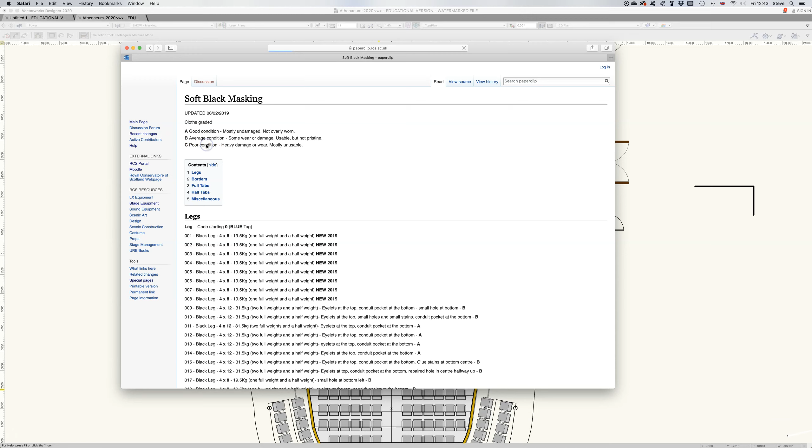So the first thing we need to know is our stock that we have at our disposal. If you go to paperclip, stage equipment, cloths, gauzes and masking, then you'll see the masking and the legs here. There's some new stock that came in 2019 that are 4x8 - 4 is the width, 8 is the height - and 4x12 is some older stock. It doesn't really matter too much about the height at the moment; the 4 width, because we're drawing in plan, is the important part.

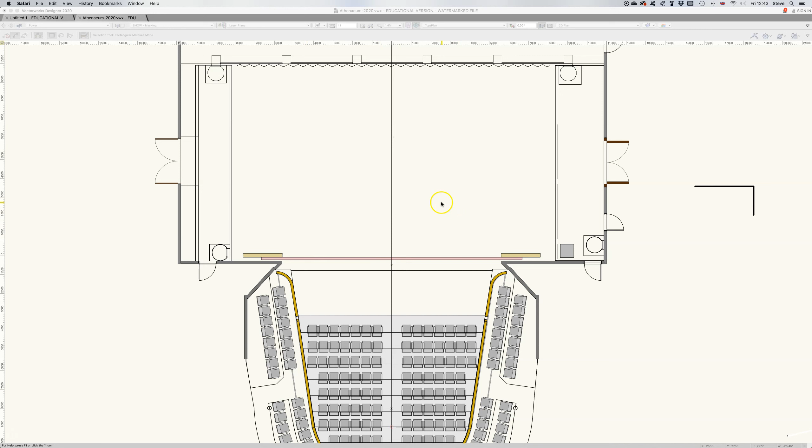So I've created a new show masking layer here, and most of the time when we are masking, we mask the proscenium arch, so I'll just do that. I'm using the soft goods tool within the event design tool set, so it doesn't really matter where in the wings because I can move anything. I can draw a 2 meter by 2 meter leg. There we go.

Now that would be fine. I could move that into position and start working out my leg masking at the moment, but there's a slight issue. The dog leg bars that we have in stock are 3 meters by 1.5 meters. So I've drawn one there just to show that this part would be okay, but we can't really have a 2 meter return on a 1.5 meter bar.

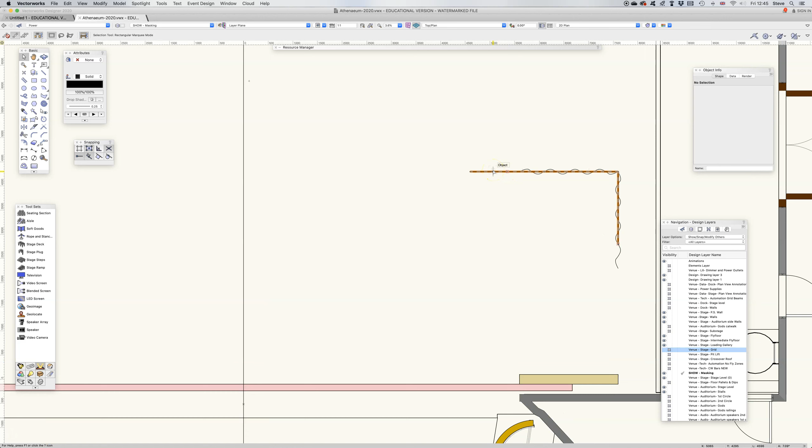We could make these up if it was important that it had to be 2 meters return downstage - this could quite easily be made up with scaffolding joiners, and we could hang that.

But I'm going to just assume that we're going to have to redo this leg here. I could edit it, but it's probably just as easy redrawing this.

I'll start in line with it, and we'll go 2 meters off stage. So that bit was right, but we'll only come down 1.5 meters, meaning that they will fit onto the existing dog legs. So a little bit of an error there, but it's okay.

So if I pull that down - what I'm trying to figure out here, if I use the line tool, is what can this audience member, who's the most extreme, closest to the proscenium arch - that's the worst seat there, don't tell anybody who's buying tickets to sit there - see. That audience member is looking past the tormentor there and straight into the wings.

Right about there, straight into the wings. So what we need to do, if we want to mask, is bring that leg down as much as we possibly can without really annoying the DSM, because they need to see it, as long as that sight line bisects the return of the leg, then the audience member is looking into masking. So that kind of works on that side.

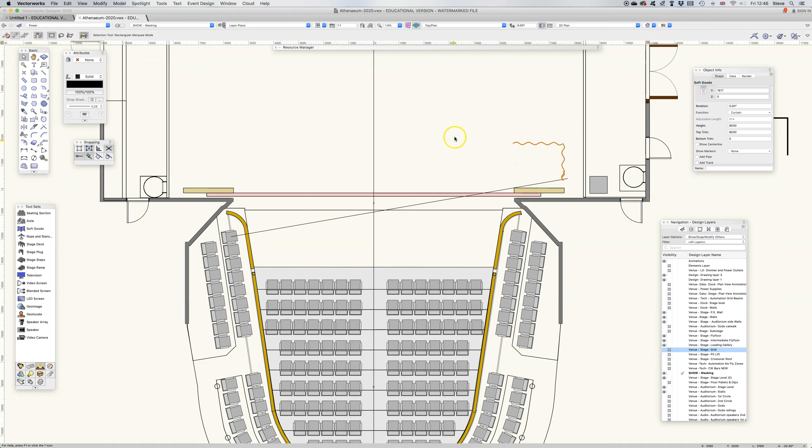I'm going to draw another one. I would normally duplicate, but since I made a mess of that first one, I'll just do another one. So we have 2 meters off stage and 1.5 down stage. There we go.

Oh, I've still got a funny little thing. I'll just duplicate them. So the next thing we need to see is what can this audience member see past that leg. As soon as they see past that leg there, we need to grab this leg here and bring it down to make sure it bisects that, so the audience member can see past the onstage part of that and into the downstage part of that. They can't see anything else.

All good, we'll bring in, just duplicate - that was Command and D. And looking past this leg here, again we can just grab that and bring it down, little nudge, and one more line.

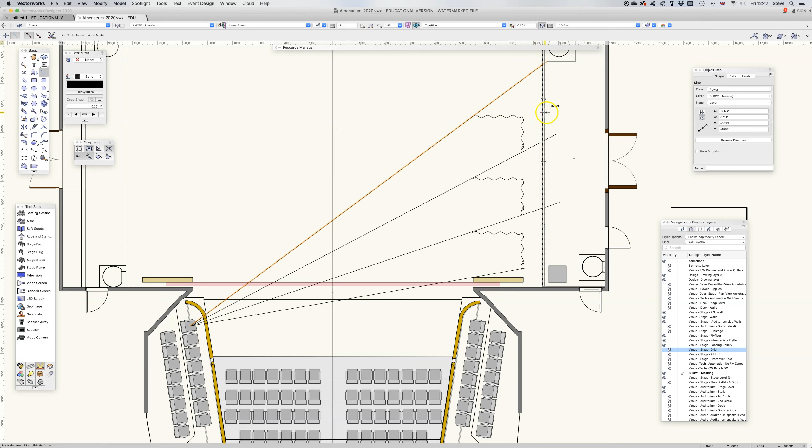I think we should be able to do it with 4. You can see beyond that corner there, and select Command and D. There we go.

So that leg there can sit nicely and mask the end of whatever that upstage cloth is there, whether it be a cyc or - maybe move that down a little bit - it might be the kind of thing to try and close that gap up. There we go, could be a cyc or a full curtain across the back there.

So that's the wing masking done. I only need to do one side. If it's going to be a symmetrical stage, then I can just quite simply mirror across the center line, and I know those, if they work on this side, they'll work on the other side. So that's fine as far as the masking is concerned.

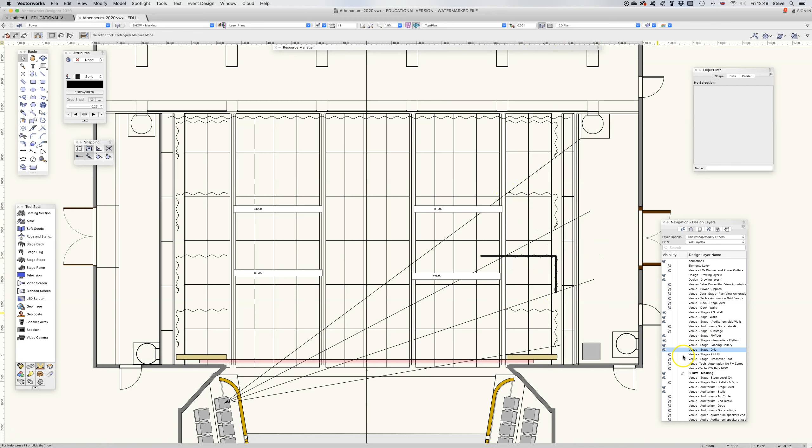Again, we'll do another little tutorial on how to place the points, but it's important to remember that the ropes coming down there, there and there are not necessarily in the same place as the end of the masking. I'll just switch the grid up again and move that dogleg out of the way. But that's the masking - that's what you would need to mask the stage.

Hope that helps. About 5 minutes work.